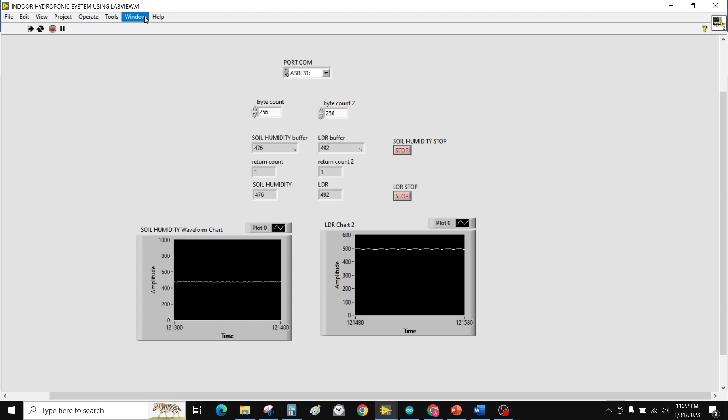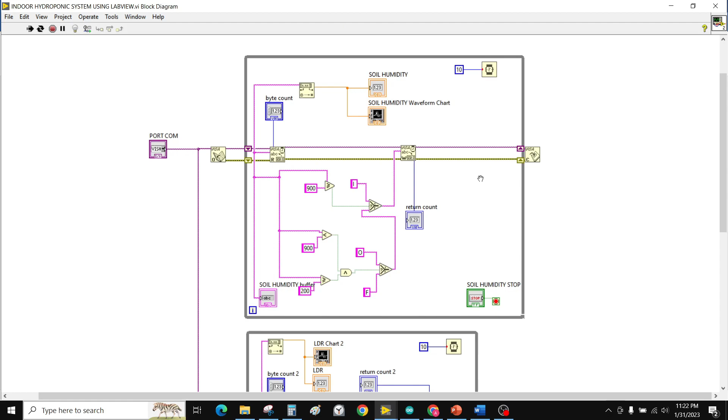Okay, so today I would like to present our project on the hydroponic system, indoor hydroponic system using LabVIEW. Okay, so as you can see here right now we have the block diagram. So we have two while loops here. So basically each while loop consists of each sensor, which is LDR sensor and soil humidity sensor. So this first while loop here is responsible for the soil humidity sensor, and the second while loop here is responsible for the LDR sensor.

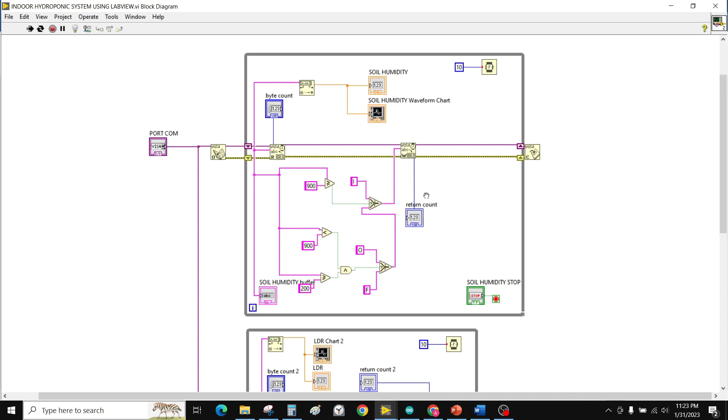So okay, so brief explanation here is we use like a comparator method in order to provide sufficient output for the actuator, such as for the LED matrix display and the relay module. So okay, so that's just a brief explanation on the block diagram.

Okay, so for the front panel here, as you can see, it is currently operating and is currently connected to the Arduino Uno, which is taking real-time data, such as for the soil humidity sensor we have right here at the bottom left corner, which is the soil humidity waveform chart. We cannot read the readings here, but we can actually read the exact reading here, which is right here. So this is for the soil humidity sensor, and this right here is for the LDR sensor, and this right here is for the LDR sensor waveform chart.

So basically we are currently using COM port ASRL31, but duly noted that this COM port can actually be changed multiple times. Sometimes it can be changed because when connecting and disconnecting the microcontroller, the Arduino Uno, from the computer, the COM port can accidentally change, like increasing in numbers. So currently now it's 31, so maybe if we disconnect and connect it back, it will change to ASRL32. So that is from our observation.

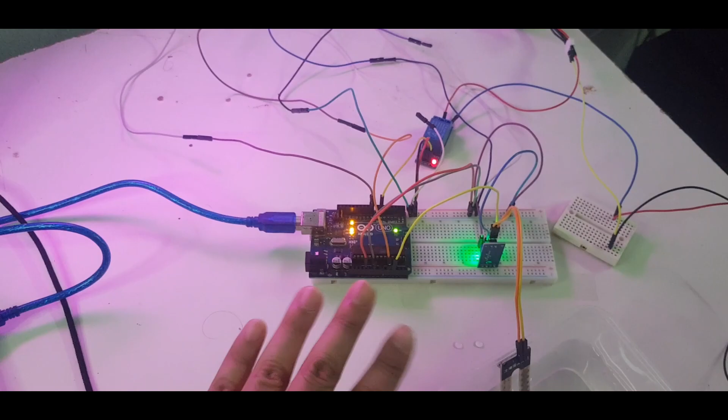Let's move on to the experimental setup and how it's simulated. So hello. So this is the concept design of the hydroponic system. As you can see, this is the experimental setup. So we got here the Arduino Uno as the microcontroller for the processing, and we have the soil humidity sensor, we have the relay, we have the external power supply to supply the DC motor valve, and we got here the LED matrix display.

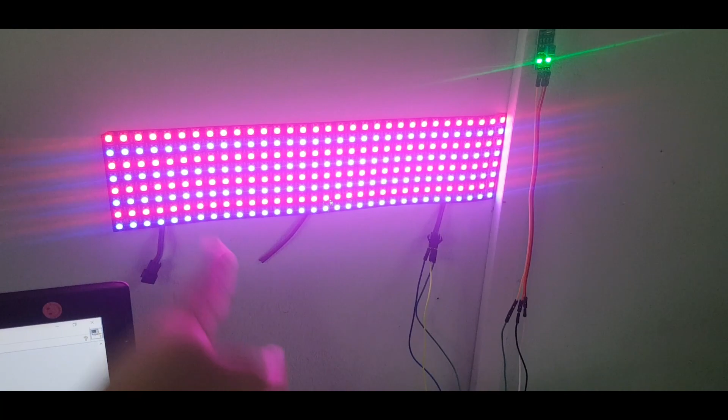We are using the red and blue color spectrum, which is effective in hydroponics in providing efficient photosynthesis. And also we got here the LDR module sensor to detect the light intensity of this whole room. I don't want to show the whole room because it's kind of messy. So anyway, back to the experimental setup.

So here we have the plantation itself. We have the water tank, and the water tank is filled with water, and the hose here will provide the water to the plantation, which is pumped using the DC motor water pump. And the hose here is actually like a safety measure in case the water is overflowing out of the plantation.

I don't want to wet the whole table with the water of the plantation. So this hose right here will send the extra water to prevent leakage. It will send the overflowing water back to the tank, which is kind of like a closed loop system.

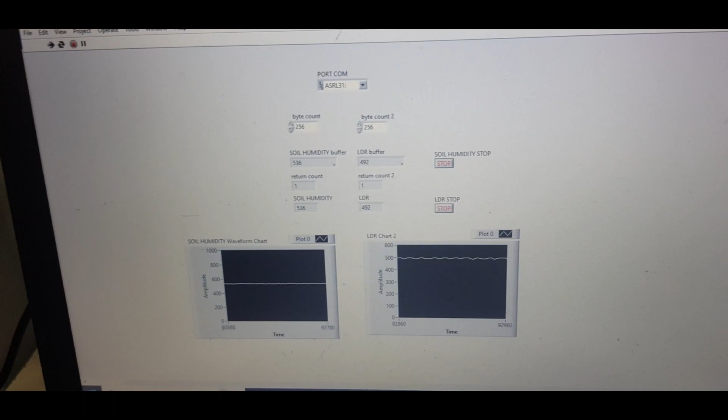So now here we have the LabVIEW front panel. So here we can see this right here is the soil humidity waveform chart. This is the LDR chart. So as you can see, both here are actually measuring, recording the readings of both sensors. So this is the soil humidity sensor, and this is the LDR sensor.

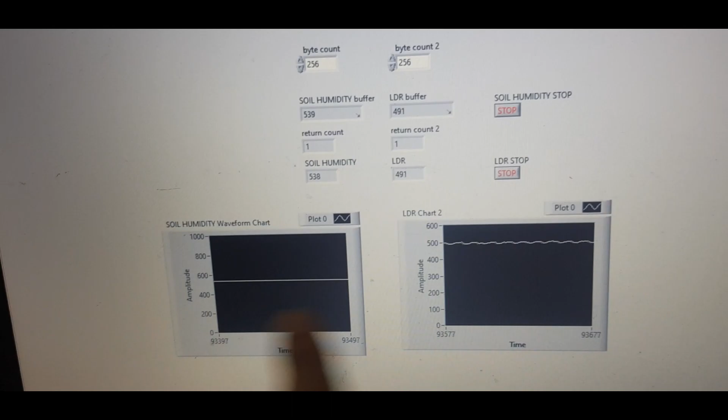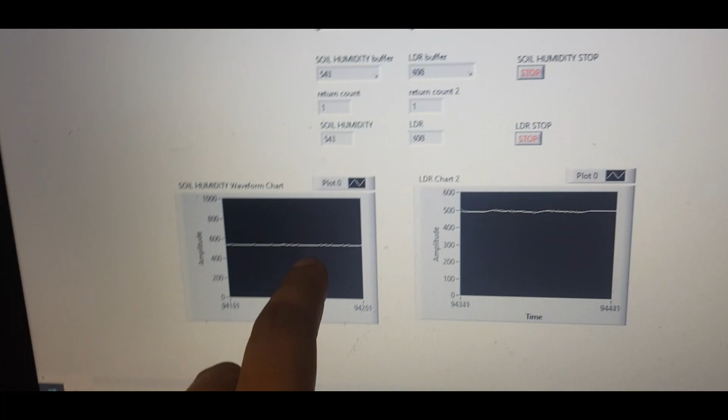So we are using the COM port. But note here that sometimes we need to refresh the COM port in case the readings are measured incorrectly or are illogical. So we must check this COM multiple times, and then we go ahead with the experiment. So we're using byte count 256 for both sensors.

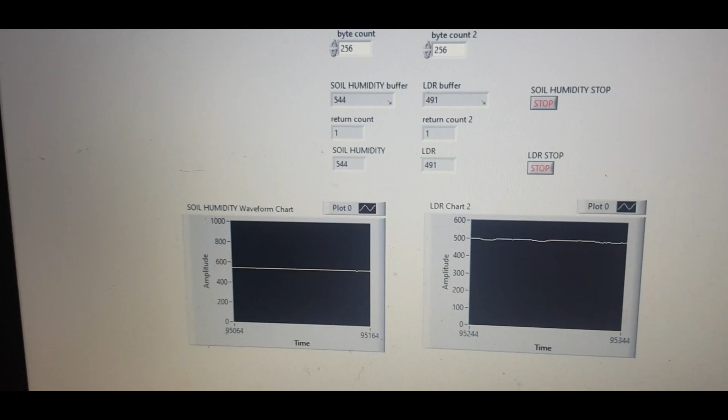So as you can see right here are actually the readings for both sensors. So this is for the soil humidity and LDR. So this is the buffer and this is the reading. So as you can see right here, we have the waveform charts for both sensors.

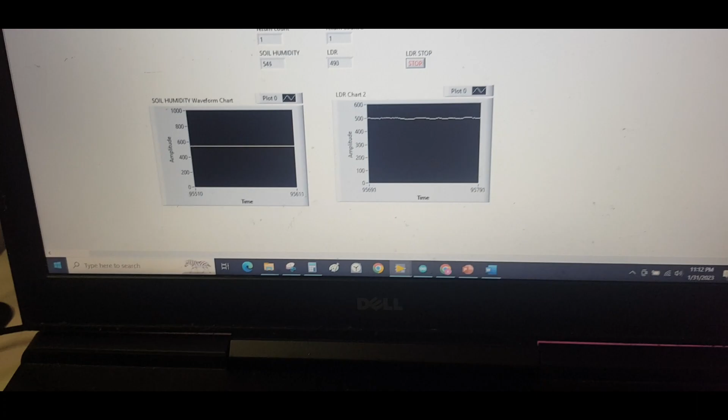So right now I want to demonstrate. We don't have any plants, we don't have any flowers or strawberries, so I'm just gonna simulate the real deal. You can see the plantation is filled with a bit of water. So I want to simulate what if the water is not filled enough in the plantation. I don't have the plant or the flowers, so this is just to demonstrate the case for the hydroponic system.

So when we have plants, of course in photosynthesis the plants use basically water and sunlight, right? So it's indoors. So this is the main water supply from the tank. So here, to demonstrate what if the water is not enough to supply the plantation, I'm gonna demonstrate.

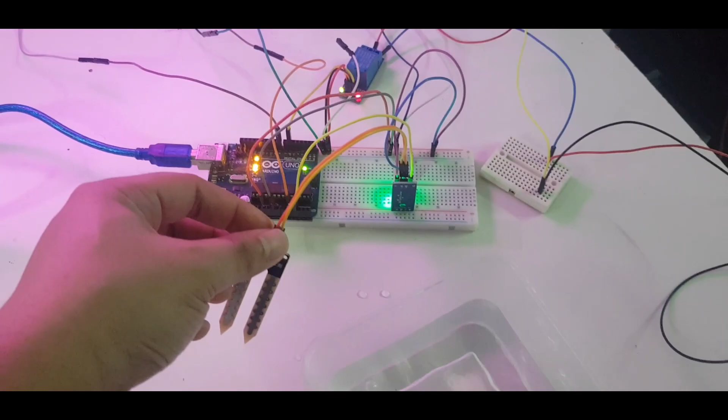So as you can see, the relay will turn on and the water will flow into the plantation, provided by the DC motor water pump. So if it's at a certain level, as you can see here, it will stop immediately and the relay will turn off. Okay, so let me demonstrate again. Okay, so this is the actual reading in real time.

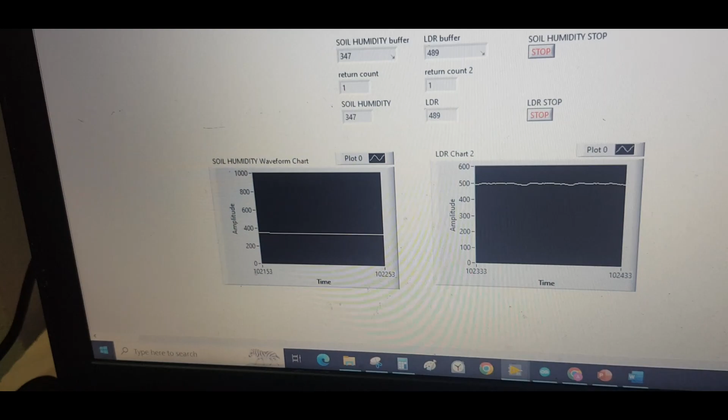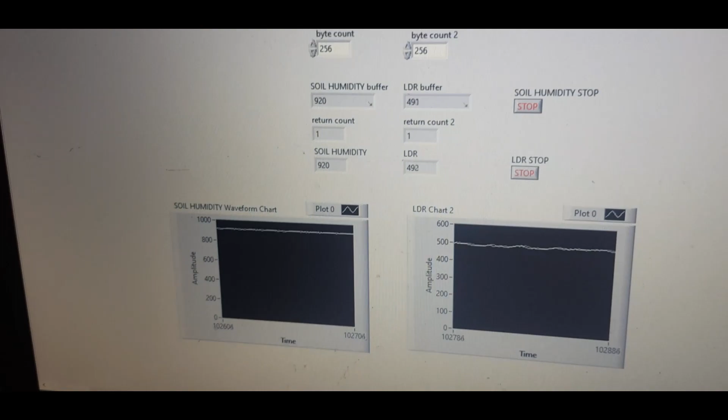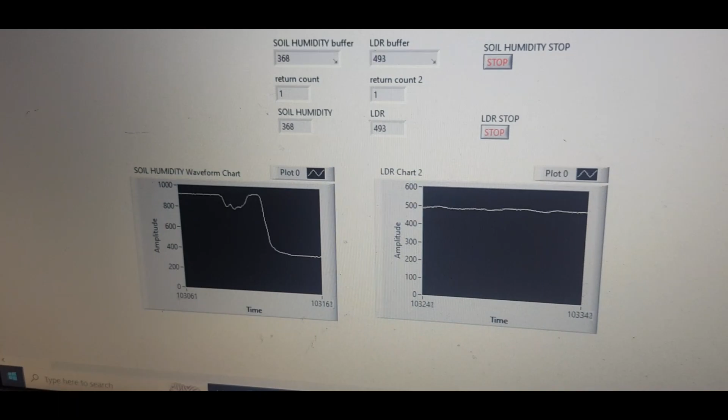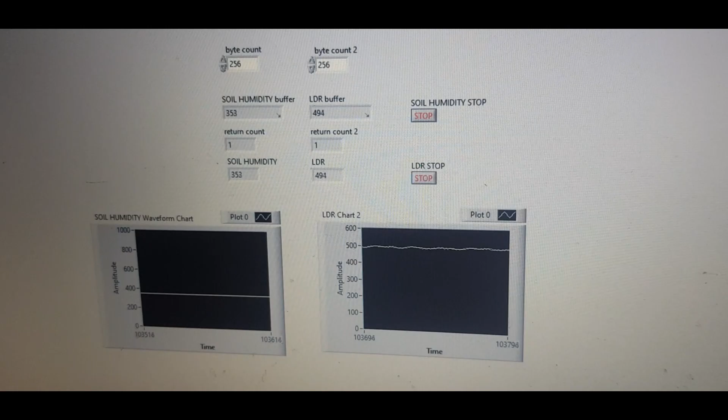So when the water is not enough, the readings were actually 900 and above. So this will trigger the relay. If there's enough water, then the readings will go to 300 to 400. Then the relay will trigger off and the water pump stops pumping water into the plantation. So that's one of the main elements in photosynthesis, which is the water.

So what about the sunlight? We are using the concept of an indoor hydroponic system, right? Sorry. Okay, so here we have the LDR. The LDR is mainly for providing the artificial sunlight in the indoor hydroponic system. So we don't use sunlight at all. For photosynthesis, we are using this light, which is the LED matrix display, to provide artificial sunlight. So we are using blue and red spectrum.

So there is the LDR right there. Okay, so right now the room is actually a bit dim, so the brightness right now is set to 100%. So what if the room is brighter? So there's a bit of a difference there. I can't be sure if the camera can see this, but oh my god.

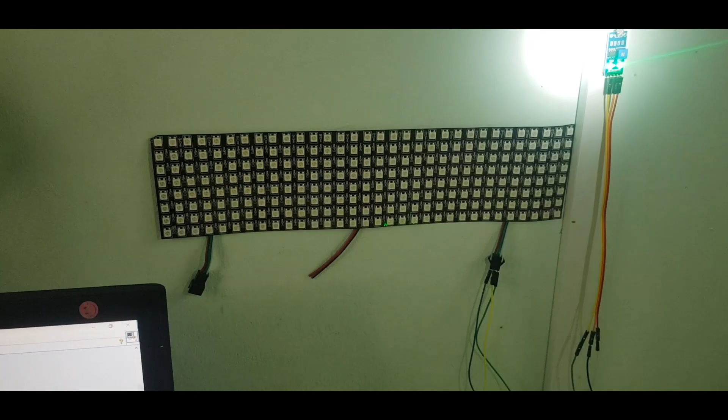Sorry. But the light is down to 50% brightness. Yeah. But if the room is lit up a bit more, then the whole LED matrix will turn off, and the brightness is set here to 0. So if there is some light in the room, it will set to 50 brightness, and if there is no or even dim light, it will set the brightness up to 100%.

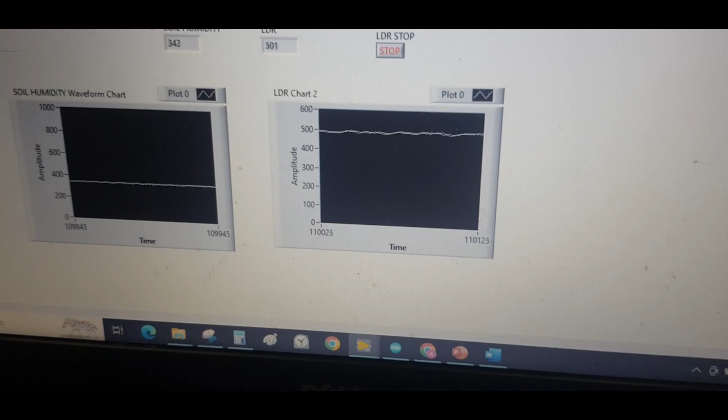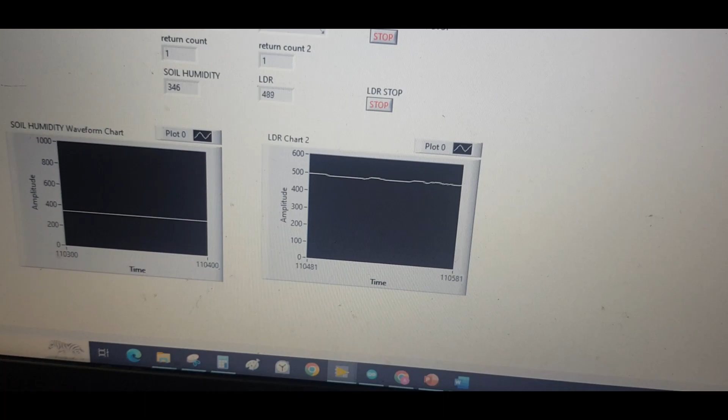Okay, so I think that is all for the experiment. Okay, I forgot to demo the readings. So as you can see here right now are the real-time readings for the LDR, the current light intensity of the room. So the LDR is reading around 490 to 500. At this current rate, the LED matrix is set to 100% brightness.

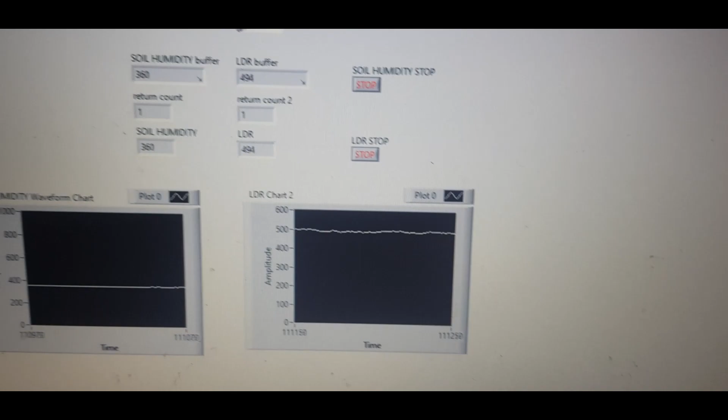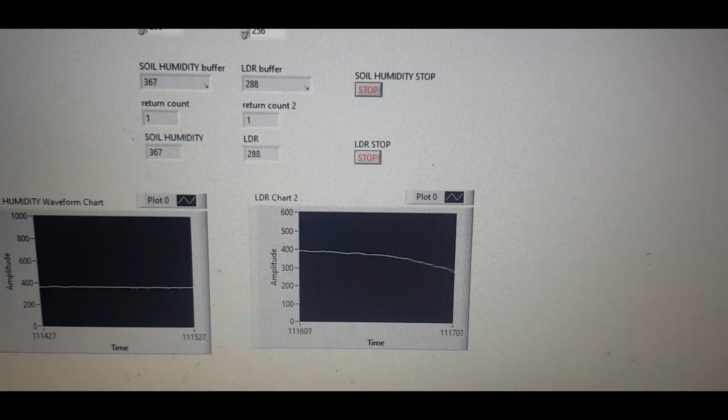So if there is some light, you can see the readings start to go down a little bit. So if there is more light, it goes down, and then the whole LED matrix will turn off.